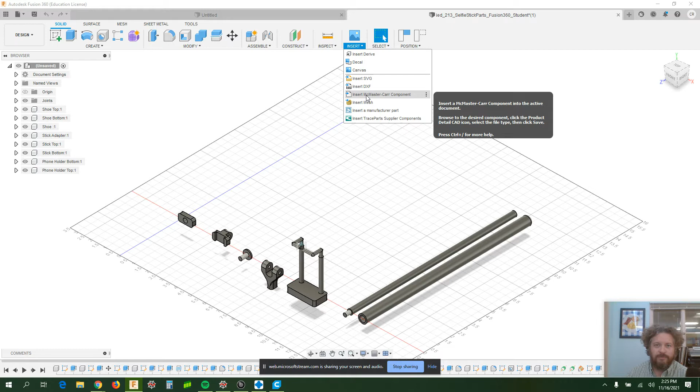So if you go here to insert, you can insert some stuff, decals. You can put pictures on your things, other components from different types of 3D rendering software, but also insert a McMaster-Carr component. If you click here, it pulls up a website. You might get a warning box that says, 'Hey, you're going to go to a different website.' McMaster-Carr is an online hardware store. They have tons of stuff, and one of the coolest parts is on the website they have 3D files on hand.

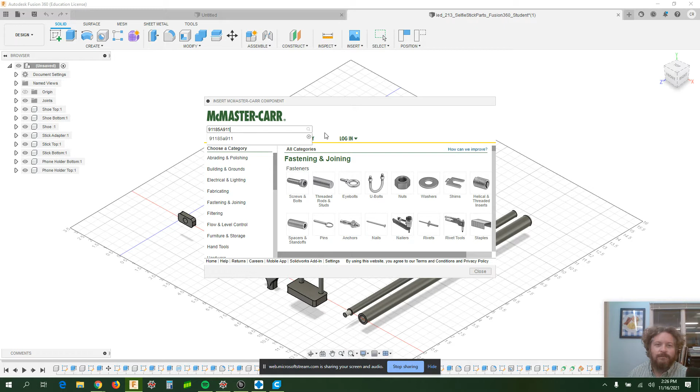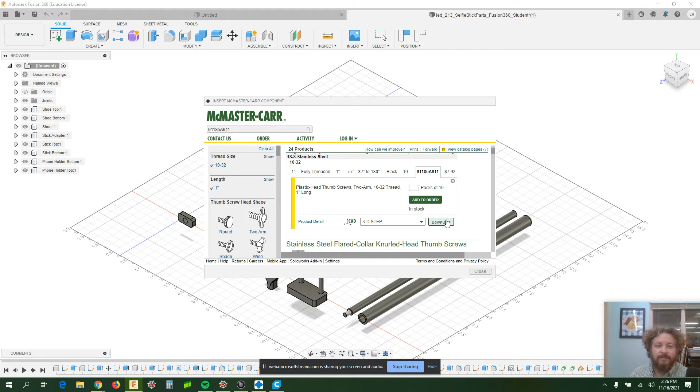So you're going to type in this part number, 91185A911, which is a thumb screw, plastic head thumb screw, and you're going to use this model to get the step file, which is right here, the 3D step. I'm going to download that. You'll see, how much are these? $7.92 for 10 of them. It's not the cheapest place to find hardware, but it's a very great resource for these sorts of things.

I'm going to download that, and it should pop into my components list after a moment. See, it locks up the computer, and there it is. Sits right here. They have tons of things on McMaster-Carr. It's pretty great. Hit enter, and it's locked in place.

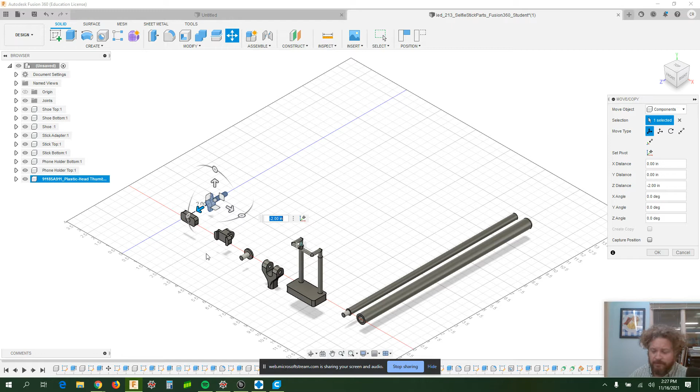So these are not necessarily all different bodies. These are all components, and so they are all movable in this space. Each thing is a different object that was created. I thought this was two objects. Maybe it's not.

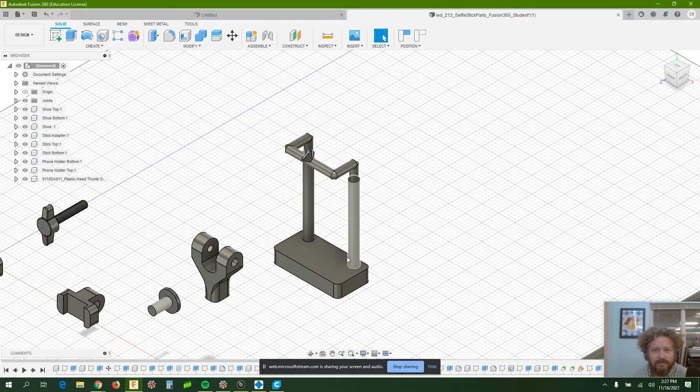So this is a selfie stick, and we're going to start assembling the selfie stick. You're going to do that by creating joints. Each of these components will be joined together to create an assembly, and each type of joint, there's a bunch of different types of joints that we'll be using.

The first step is to find which part of all of these parts is going to be the one that you don't want to move around, sort of the base part, if you will. I'm going to choose this case, if you will, for my base part. And I can right click on it. What I want to do is ground this part, which is not here, actually.

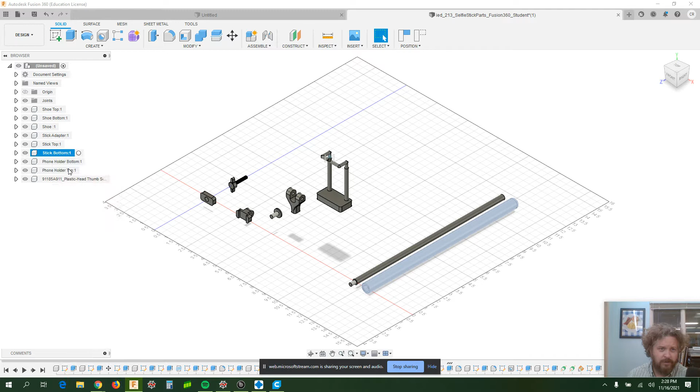It's over here. Just when you click on a part, there's a little dashed blue line underneath telling you which one's selected. I'm going to take the stick bottom. I'm going to right click on this here, and I want to click ground. What I'm doing is making this component immobile.

So if I grab on it now, it won't move. I'm clicking here and trying to drag it around. All the other parts are still mobile. I can move them around, but this one's not. That one's gonna stay still. It becomes important when you want to move parts around. You don't want all of them to move. You only want the ones that are supposed to move to move. And so this will be the one that doesn't move.

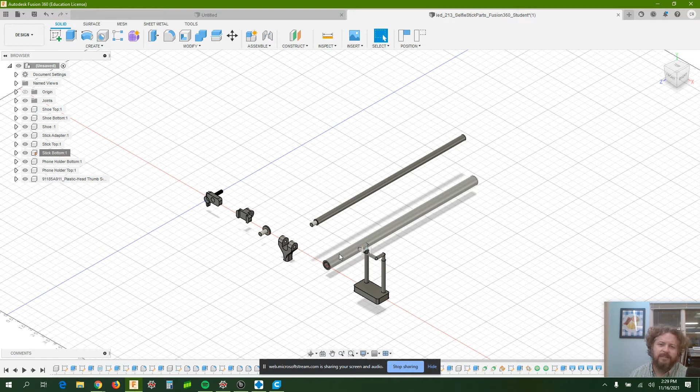Now we're going to make joints. We're going to take this inner rod and put it into the stick bottom. This one's called the stick top. We're going to put it into the stick bottom. I could just grab it and move it in the right place, but that's not what we want to do. We want to have Fusion 360 do it for us.

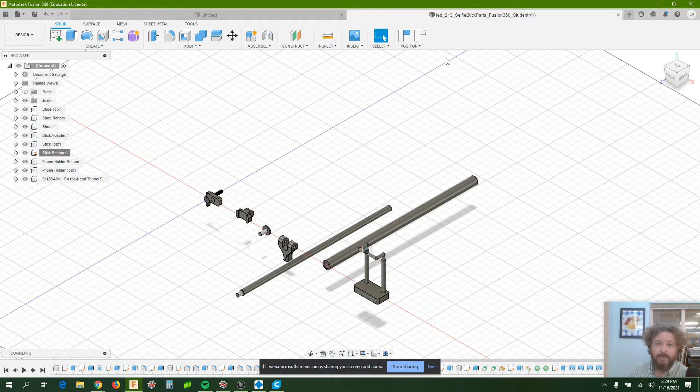It's going to be very hard to do assemblies if you don't have a mouse, so make sure you get a mouse. I'm going to click on joint, and now I need to choose what I'm going to join. And I want to do this, the base right here.

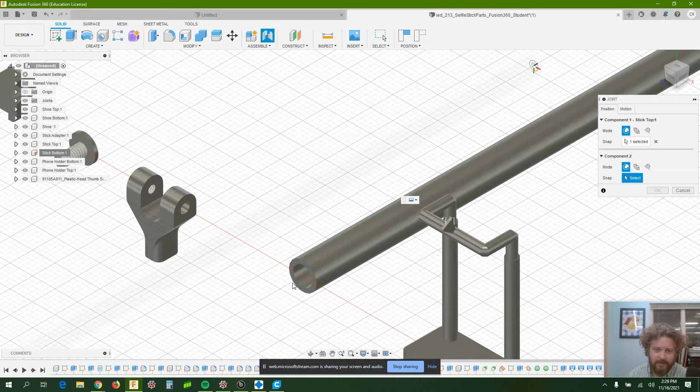So the inner cylinder, the circle around the cylinder, I want to choose that one, and I'm going to make it go into this one right here. This is where it gets confusing because I can make it go up here if I wanted to, or down here on the side. But choosing which areas it should go into is kind of tricky. It's like a big puzzle that you don't know how it goes together. You have to figure it out.

And so that's a joint, and we can keep moving these parts around. But we want to specify what type of joint it is. We have positioned it in the right area, and now I want to choose what type of motion it has. There's revolute, which means it rotates, rigid, which means it doesn't move at all. There's slider, which oddly enough, this is not an example of. Cylindrical, pin and slot, planar, which are like two surfaces that slide on each other, and ball joints.

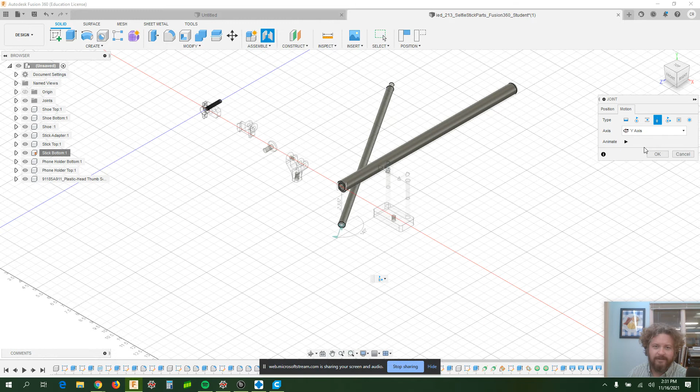This is actually going to be a cylinder. You'll see it moves back and forth in that motion there. If I wanted to change the axis that it moves, I can choose right here. You'll see how wrong this is there. Kind of fun to watch. And Z is actually okay. That's the one I started with. And then there's also the X axis. We don't want it to slide on any of these because they are unnatural. We're going to choose Z.

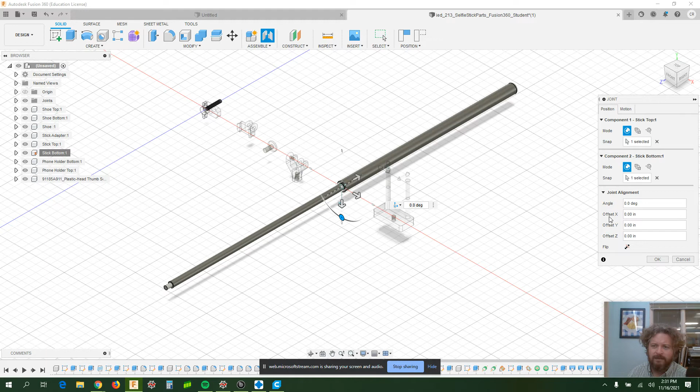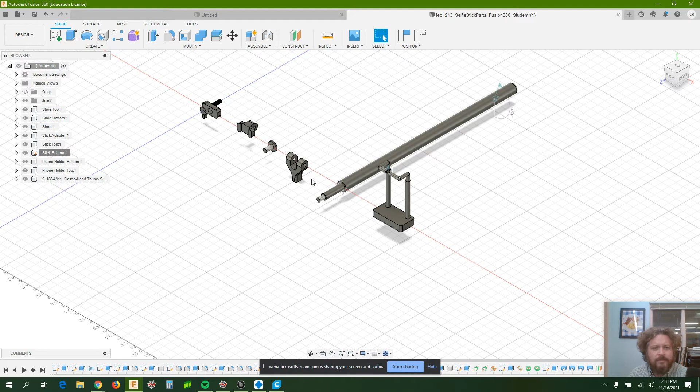And if you wanted to, you could go back to position and you can restrict how far that joint goes. But right now, we're going to leave it as such. And you'll see right now I can slide it in and out of that cylinder, but it's not limited in any direction. It's just going to slide as much as you want. And so I'm going to leave that there. So now we have one joint done. Now we're going to create more. A lot of these are going to be cylinder type joints or revolute joints. Very few are going to be static because we want this thing to move around a little bit.

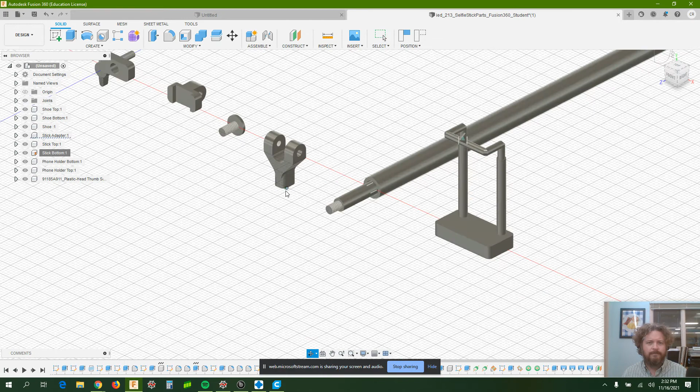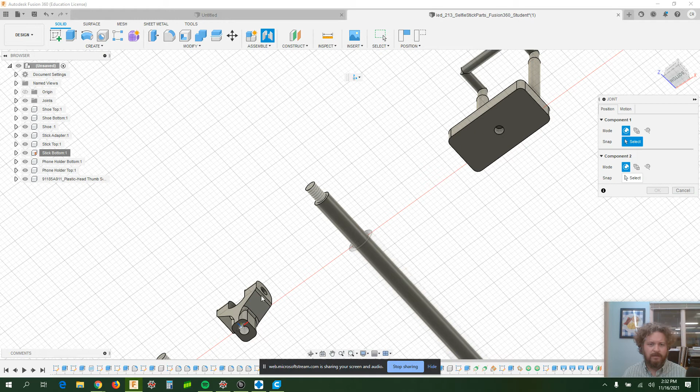This part goes on there next. You'll see that there is a hole in the bottom. This looks threaded. It's supposed to be threaded, but they're not modeled threads. They're images. I'm going to make a joint between this base here and this right here. And I'll choose, well, I guess I'll choose that guy. And I'm actually going to, ooh, what in the world just happened? I'm going to cancel that, make him go back. Try that one more time. Choose that. And now this.

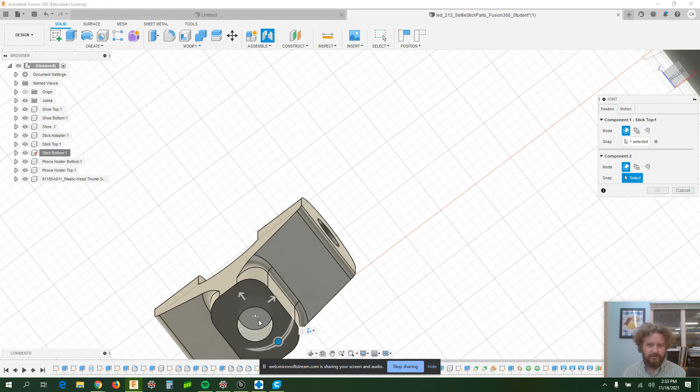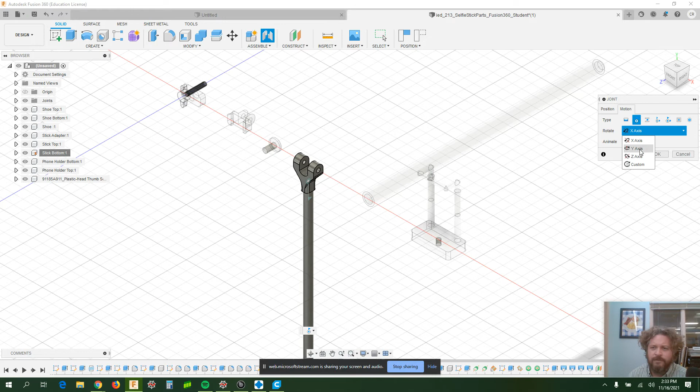Now, what I don't want is to choose this one right here because then they're going to be touching just the tips. I want the threaded portion to be all the way to the back. So I'm going to move my view cube a little bit and choose that one right there. I'm going to go back to the home screen. And we don't want this to be a cylindrical mate this time. That's going to be an inappropriate relationship. This one's going to be a revolute. We want it to be able to rotate but not slide. Choose rotate. And you can again choose the different axes that it revolves around, but it sometimes chooses the correct one by default. And we'll click OK.

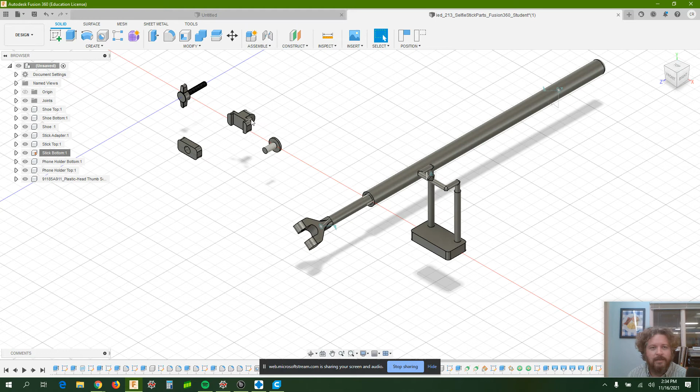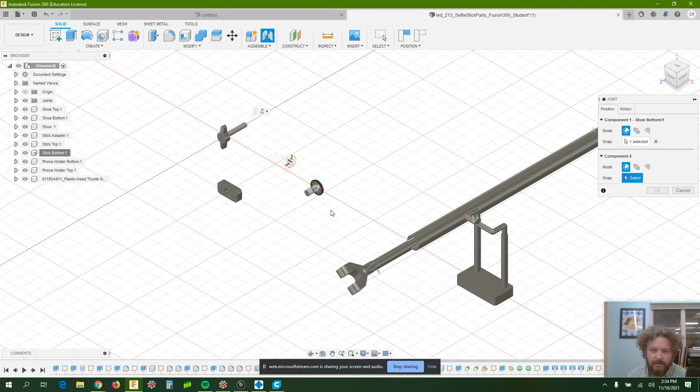Now it goes back to normal, and now you'll see I can still slide this back and forth, and I can turn this one around. It is now revolving around one another. There are a few other parts here to go in. Let's try a different one. We're gonna do a revolute mate between this cylinder here and this one here. Let's see what that looks like. You see how that's off by a lot? I can now move it out of the way, and I think it should still work.

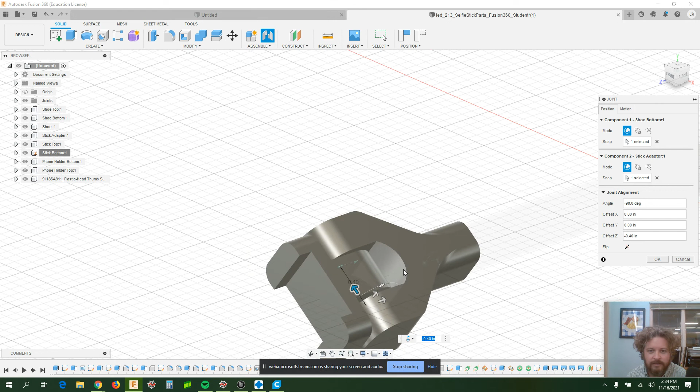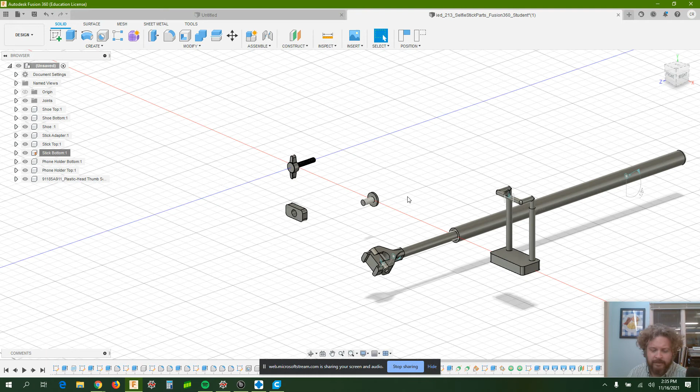Go back to the motion, and you can change and select the axes. That's going to be the wrong axis. How about Y? Also wrong. How about Z? There we go. Now it goes way too far, but that's okay at the moment. And now we have several components that are now locked together. I can move the whole thing still, which is pretty cool. So we will need this screw to go through those two holes to hold them together, even though they're still locked in place right now. This cylinder goes through this hole here, and then the base of this object will go on there, and then eventually through the hole right here.

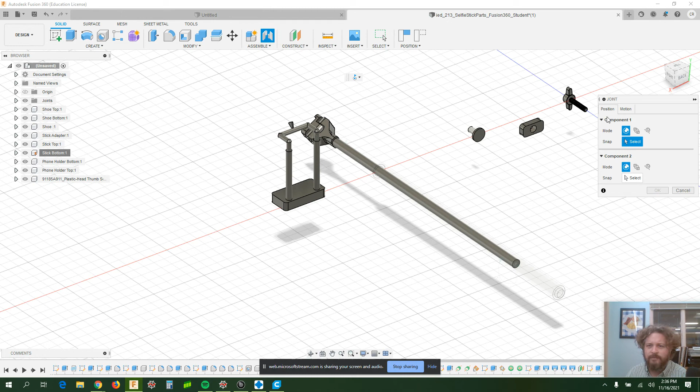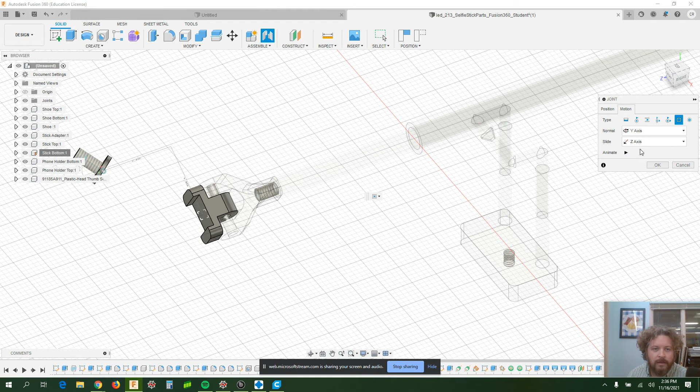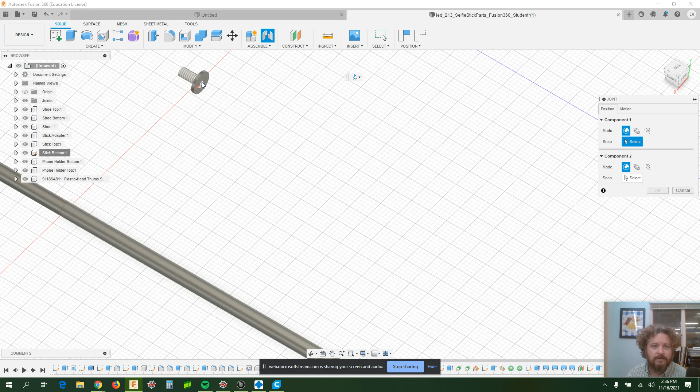I'm going to allow you to do these independently. I think it's going to be a planar mate between this and this. Let's go to planar. Ooh, I've actually not done a planar mate before on Fusion 360. That's pretty fun. So it appears it can still slide around. You know what? I'm going to cancel that one. I think this should be rigid, in fact. We'll choose that one again. That surface. And this surface. And we'll make it rigid. So it does not move.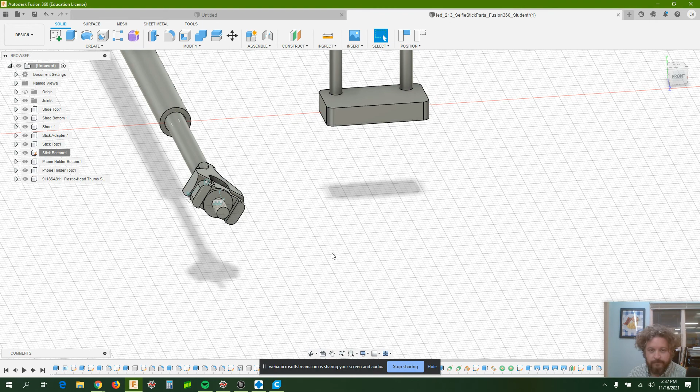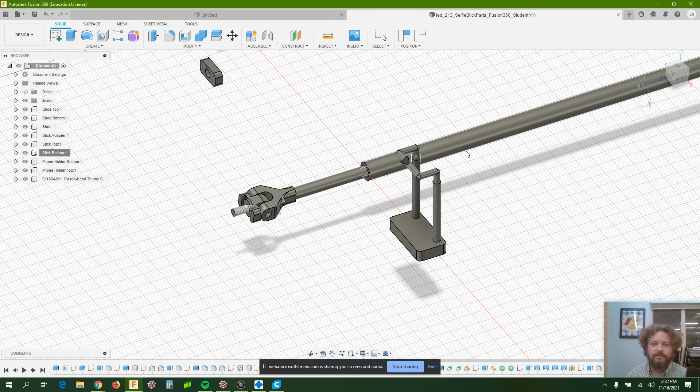Okay, at the end of this, what you're going to do is submit to me a PDF drawing. Drawings work essentially the same way. I have to save my project. Of course, bad practice by not saving my work as I would go forward. The whole assembly is now going to go into a drawing. I forget this always takes a lot of time.

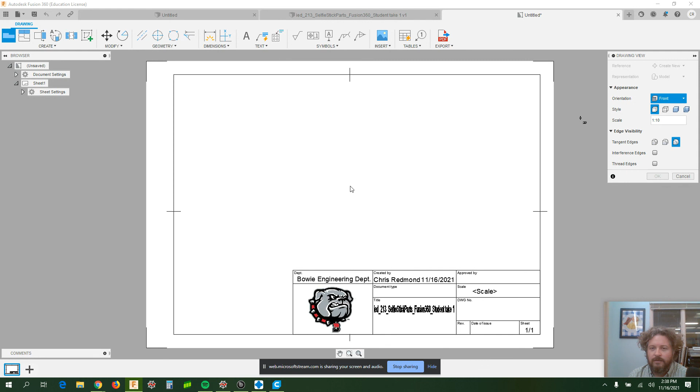The drawing does not need to be dimensioned, but the only view that I should see of an assembly at this time is an ISO view. So you see it's very, very small. We don't want to see the front. We want to see the isometric. Something like that. 1 to 10 is too small. Let's go 1 to 5.